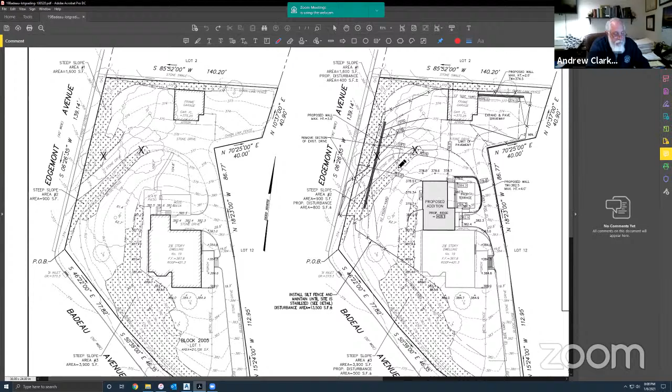And then we're replacing some of that stone driveway with landscaped areas. So I think in the end, the final analysis is going to be a net improvement and a significant improvement over the existing conditions. So there shouldn't be any problem or negative effect from approving a variance for the disturbance of those slopes.

And I think that covers the main points of Mr. Dower's letter. I'd be happy to answer any questions either from Mr. Dower or the board members at this time. Thank you, Mr. Clark. Any questions from the board?

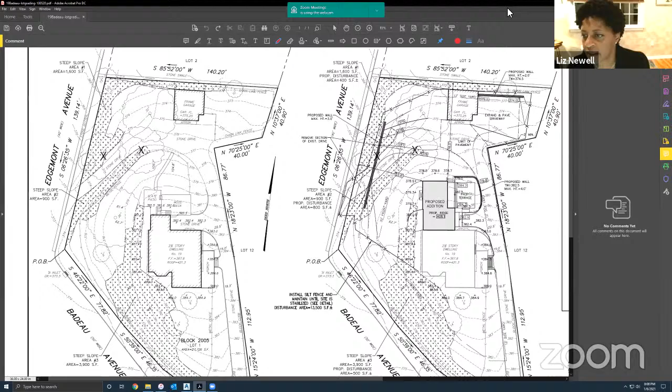Seeing none. Suppose I have one. I would just ask, I know you proposed the installation of a dry well. Do we have any idea what size dry well that would be? Well, it's a little over 1,200 square feet. So it's probably a 6-foot diameter, 3-foot high tank with some stone around it.

And Mr. Dower, from the board standpoint, would that be acceptable? That would be acceptable. Okay.

Thank you. Mr. Dower, do you have any additional questions? I think Mr. Clark picked up on every item. The only other question I did have on number 11, the paver block drainage swale, which is an existing and older style drainage swale. I would defer probably to Lori and the city engineer's office to see how they want that restored.

It should be noted on my plan, and that should be restored to a full height curb there, and any impact to that stone fringe that's there, because that road was recently rehabilitated and redone. So I would certainly have to note that on the plan and coordinate with Lori about how that should be best handled.

Okay, and as I noted in our letter, the increase is de minimis. It's 8 square feet, which is probably the lowest increase we've ever had that I recall. And the fact that the applicant is proposing to put in drainage improvements in spite of that, I think is commendable.

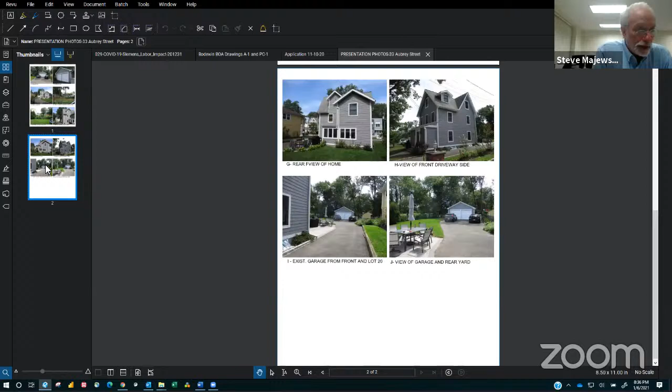H looks at the side of the house, and you can see the front used to be an open porch at some point that was annexed into the house. So that was probably open in 1895, and some of that is part of the crawl space in the basement, so I couldn't really tell, but it looked like very old original structure. I is standing at the front of the driveway looking back towards the garage, and you can see a shed building on the adjacent property to the south. And item J just gives a little better view of the patio and the garage area.

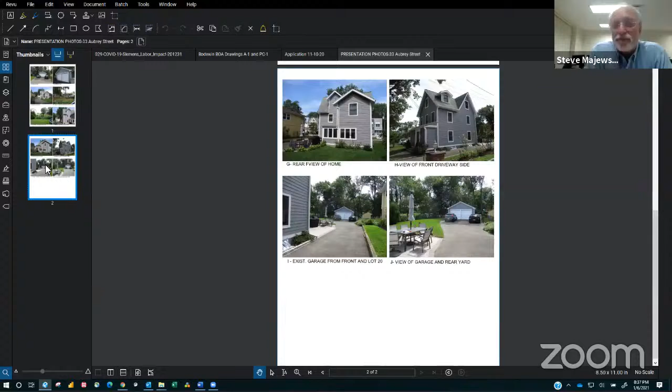I only submitted those photos hoping to help understand the property in case anybody couldn't get there to see it in person. I did not know how the weather was going to be as it approached the time of this meeting, and it might have been covered with snow. No, we appreciate that and encourage all applicants to provide photographs, so thank you very much for doing this.

Joe, did you have any specific questions on these photos? Just about the setback, and I'm not sure he or the property owner has an answer. The other two houses on either side of us have their garages in the front, and I think one reason their houses were set back is because that's the length of their whole driveway, and that's how the house was positioned. My garage was always detached, and I think it was originally set closer because of that.

It looks like those other houses were built around the 1960s, is my guess—they're raised ranches. But both of their houses come back maybe a little farther than mine does, so from the back side we're almost all in alignment still.

Does that answer your question, Mr. Steiner? Yeah, I got it. Okay, wonderful. Any other questions from the board? All right, hearing and seeing none. Any questions from the public? Okay, hearing and seeing none.

Mr. Bodewin, do you have anything further? I believe that was your only witness, if I'm correct. Correct. I just appreciate everybody's time to take a look at the application, and we're really looking forward to living in Summit.

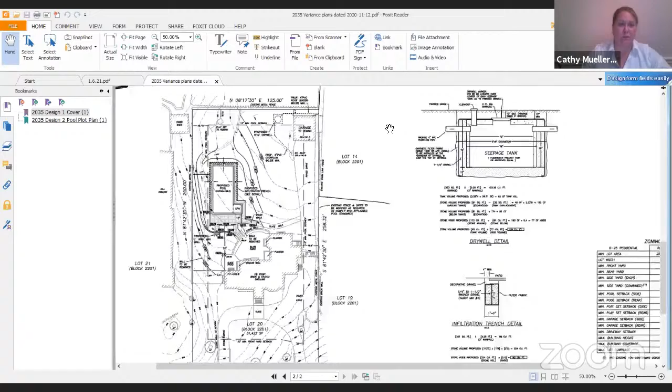There was also a comment raised in the engineer's letter asking if we were proposing a generator. We do not have a generator proposed on our plans, but with the recent storms, Mr. Wallin and his family have been considering getting a full house generator. Right now they're using a portable one, pulling it out of the garage, putting gas in it, to keep the fridge cold. If they do decide to move forward with this improvement to their property, it would result in an increase in impervious coverage.

We're here tonight for an impervious coverage variance. We're exceeding the allowable by 2,133 square feet. If we anticipate that pad to be at most 20 square feet, which is very large, it would probably be half of that, but I don't want a number that's too small and require us to come back for another adjusted variance. Per my testimony tonight, we would like to amend our application for the impervious coverage variance from 36.8% to 36.9%. We're just on the cusp of that percent, so I wanted to discuss that with the board and put it out there if anybody has questions, but to amend it per my testimony today and request 36.9% coverage variance solely for the inclusion of a generator pad for the future.

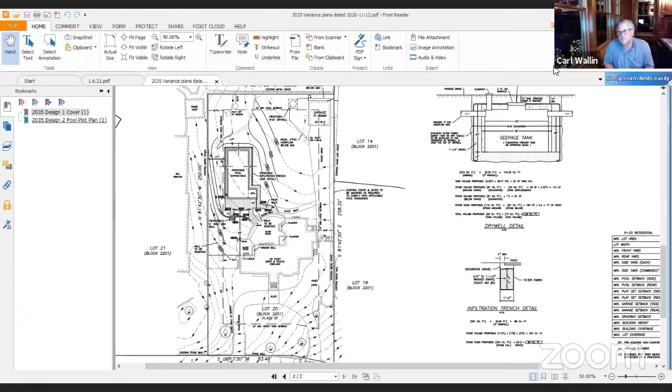Would you be amenable to us saying that we will put it on the left side of the house where the plumbing and the electrical and the other equipment is tonight? I think we could be in agreement with that. We'll respect all the setbacks as per the city code. Would make me feel better, but anyone else have an opinion? I've been talking too much. I'm fine with that too.

I shared the concern you had, Steve. It wasn't necessarily with the additional impervious coverage, but potentially a non-conforming location. But if they have to be in conformance with the required setbacks, then that's fine with me.

It's on the left side. Is that a fireplace by the AC? Like, what is that? Like a chimney or something? Yes, correct. It's a chimney. There's a fireplace on the inside there. And it would go in front of the chimney? It would. It's actually a fireplace that's not being used. So it's an unused chimney. Okay.

The only other question I would raise, Ms. Mueller, is given there's air conditioning, pool equipment and a generator there, I assume you would landscape screen with respect to all of those different mechanical units? Per the city code, the pool equipment needs to be screened by a fence or a wall. I did try to find that in the code. If maybe Mr. Dower could just confirm how high those need to be for the screening, if we were to put a fence or shrubbery around it.

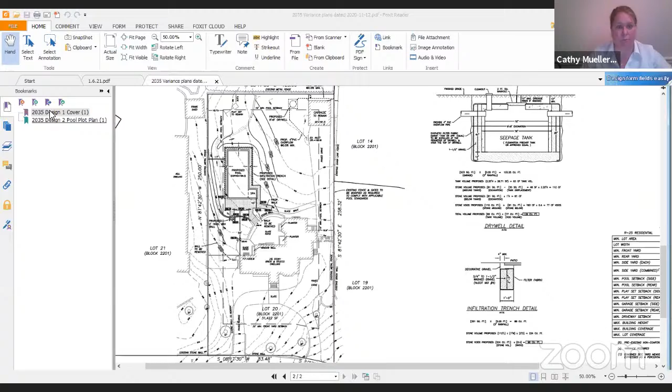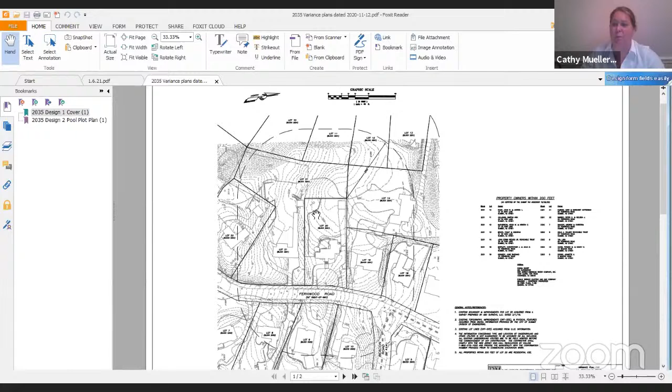Thank you, Ms. Kilby, good question. Any other questions from members of the public? All right, seeing none. Mr. Wallen, I believe Ms. Mueller was your only witness for your case, is that correct? Yes, that's correct.

So Ms. Kilby, you appear to be the only member of the public. Is there anything you'd like to say, just statements generally regarding this application? You certainly don't have to. I don't want him to think I have a problem with the pool. What I'm mostly concerned with is the runoff, because I've seen the water change over the number of years I've been living here. Okay, I'm very understanding of that. Thank you, all right, thank you both.

Wonderful. Mr. Wallen, anything you'd like to say in closing before the board enters their deliberation?

No, thank you for your time. Thanks for the detailed analysis, and again, the help from the town has really made this happen.

Wonderful. Okay, Mr. Ball, you're up. Tell us all the conditions. I've got 5 of them.

The first is the usual compliance with the conditions noted in the engineer's report. The second is, as previously noted, any drainage of the pool other than common maintenance shall be directed into the stormwater culvert at the base of the applicant's property over the driveway. Condition number 3 is that the applicant will install a fence around the pool area as required by ordinance. Condition number 4 is the applicant shall comply with the exterior mechanical equipment screening requirements and shall submit a landscaping plan to the city forester for review and approval.